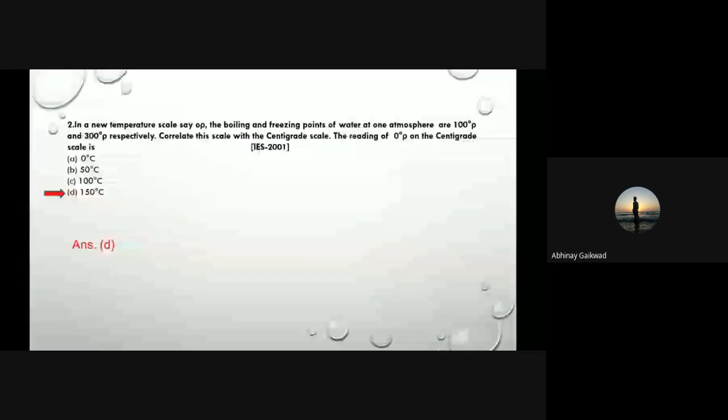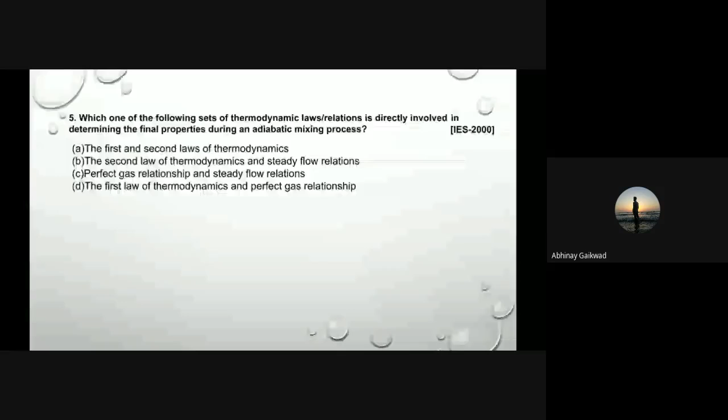Then the last quiz: the values of heat transfer and work transfer for four processes of a thermodynamic cycle are given below, and we expected the efficiency, okay, thermal efficiency and the work ratio. That also we have completed. Now today's first quiz.

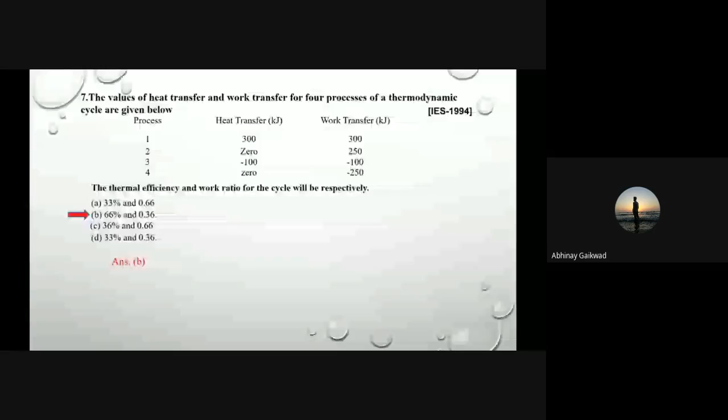Now, if a heat engine gives an output of 3 kilowatt when the input is 10,000 joule per second, then the thermal efficiency of the engine will be. I think everybody's screen, the question is appearing. So I expect now, it is a heat engine gives an output of 3 kilowatt when the input is 10,000 joule per second, then the thermal efficiency of the engine will be. Very simple question asked in IAS 1995.

A heat engine gives an output of 3 kilowatt when the input is 10,000 joule per second. So that 10,000 joule per second is converted into kilowatt. Joule per second is watt, so it is 10 kilowatt. Input is 10 kilowatt and output is 3 divided by 10. Correct answer - maximum are giving answer C.

They are wrong. So answer is - I think output is 3 kilowatt and input is 10 kilowatt. 3 divided by 10 it will become 30%.

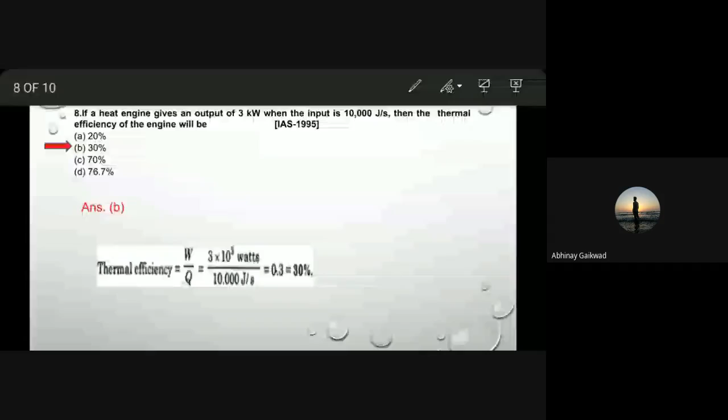Next question is ready on your screen. 170 kilojoule of heat is supplied to a system at constant volume. Then the system rejects 180 kilojoule of heat at constant pressure, and 40 kilojoule of work is done on it. The system is finally brought to its original state by an adiabatic process. If the initial value of internal energy is 100 kilojoule, then which one of the following statements is correct?

I expect answers from you in the message box. So 170 kilojoule of heat is supplied to a system at constant volume - the system is having constant volume and at that time 170 kilojoule of heat is supplied. Initially when that system is there, the initial internal energy was 100 kilojoule. So if the initial value of internal energy is 100 kilojoule, then which one of the following statements is correct?

Option A: the highest value of internal energy occurs at the end of the constant volume process. Option B: the highest value of internal energy occurs at the end of the constant pressure process. Option C: the highest value of internal energy occurs after adiabatic expansion. And option D: internal energy is equal at all points.

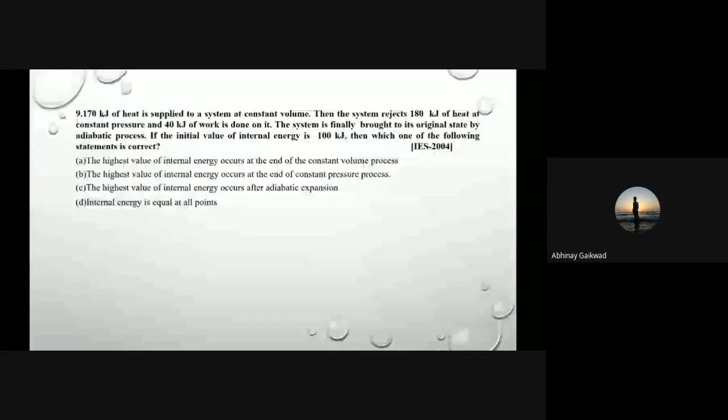Then after the process, work happens, and as work is obtained, definitely here heat supply remains the same, but in that case internal energy is also going to decrease because some part of it gets converted to work. After expansion, the internal energy goes on decreasing. So the answer will definitely be A. Correct, the answer is A.

So at the end of the constant volume process, internal energy will be highest, and afterwards it goes on decreasing during expansion - meaning afterwards the energy will not increase further. So it will be more at the end of the constant volume process.

Now next question. A gas contained in a cylinder is compressed, the work required for compression being 5,000 kilojoule. During the process, heat interaction of a certain amount causes the surrounding to be heated. The change of the gas during the process is - the question is on your screen.

I expect that more correct answers should come. The answer - gas is contained in a cylinder, compression work is there. So it is asked in GATE examination 2004.

During heat interaction, the surrounding is heated - supplied heat is 2000, so dq is equal to 2000. For compression we have to give work, my work is minus 5000, because we have to supply the work minus 5000, and heat is rejected to the surrounding, therefore it is also minus 2000. So minus 2000 equals delta U minus 5000, and if that 5000 comes to this side, it becomes minus 2000 plus 5000. The answer may be C, that is plus 3000. So how many got it, I don't know.

So C is there, Dhanasri Sonone I think, okay, Yogesh Samudhi Deshpande, okay, then Arno Gaikwad.

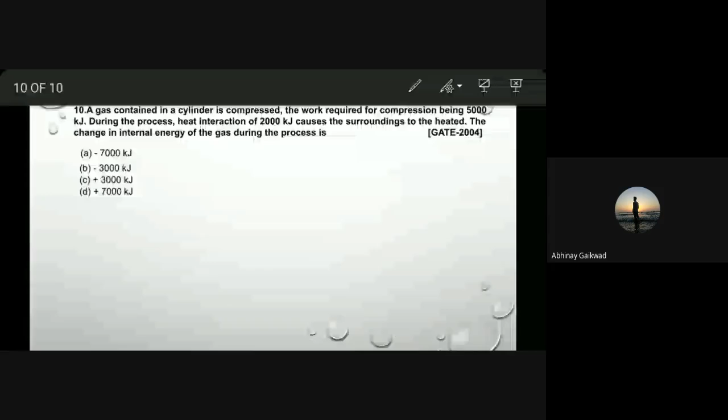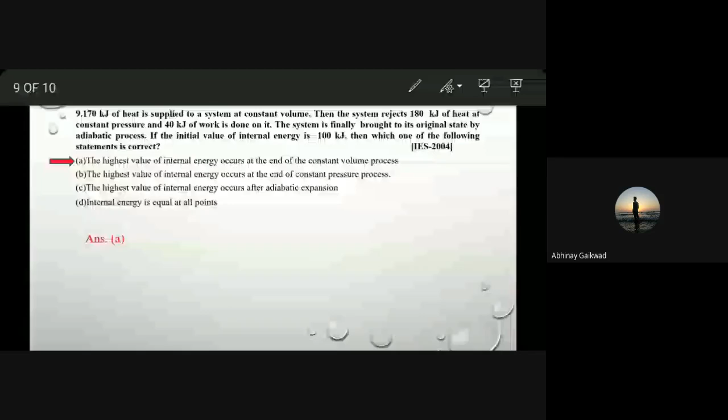The answer is C, correct, 3000 kilojoule. How it is coming 3000? Heat supplied is minus 2000 because it is supplied to surrounding, and delta U plus W is also supplied, therefore it is minus 5000. So these are the answers.

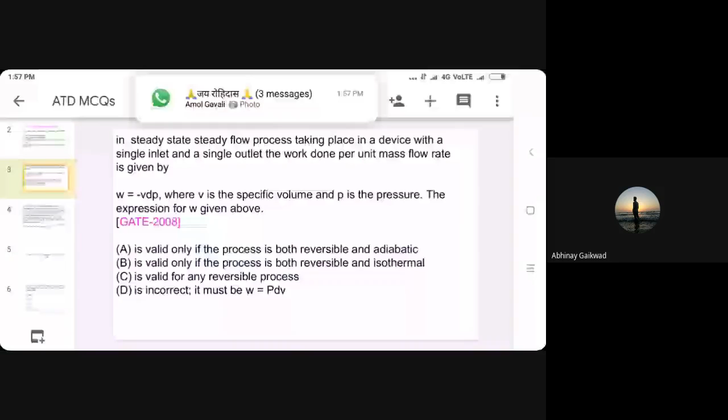Okay, next question. In steady state, steady flow process taking place in a device with a single inlet and single outlet, the work done per unit mass flow rate is given by W is equal to minus VdP, where V is specific volume and P is pressure. Expression for W given above, what is V? W is equal to minus VdP.

So this expression is going to be valid for which process? A is valid only if the process is both reversible and adiabatic. Is it valid for process? It is incorrect, it must be W is equal to PdV. Okay, so what is your logic?

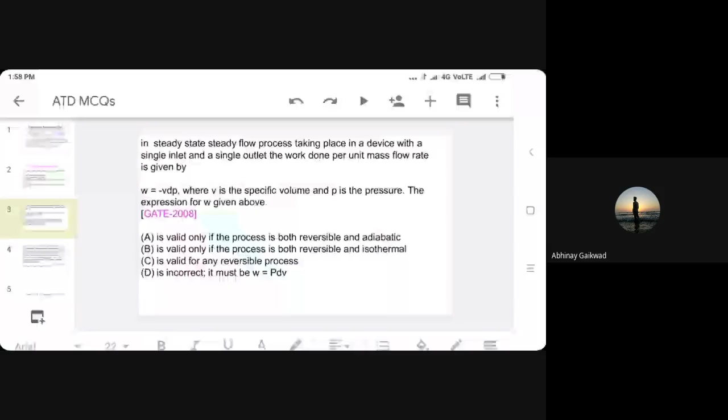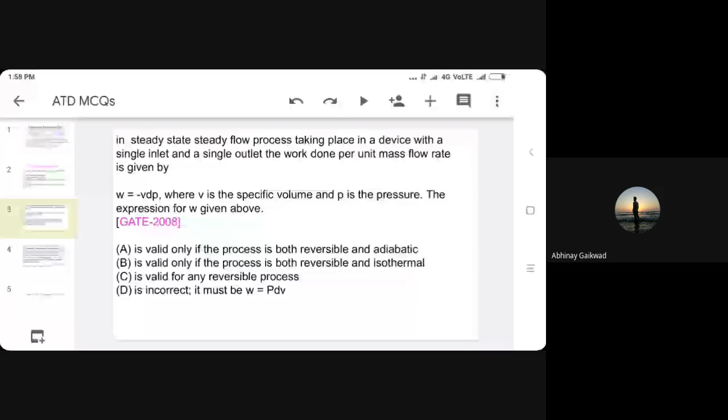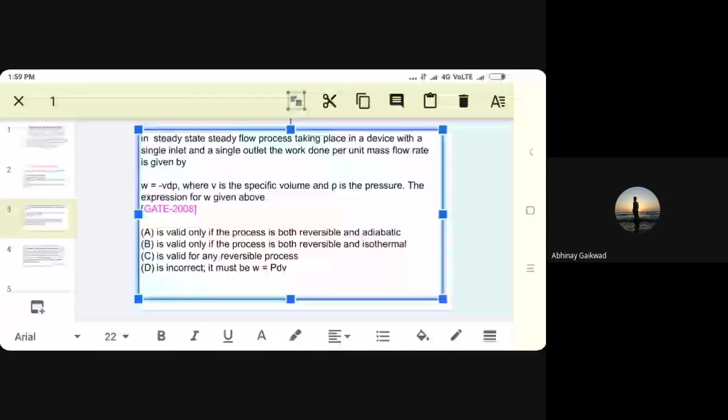So reversible process there is valid only for reversible process. Other processes, cyclic processes we are considering, okay. Other processes are there. We are generally considering work as PDV, but only for reversible process. And if it is steady state reversible process, the work can be considered as PDV... this is going to be valid only for the reversible process.

Okay, next question. A gas expands in a frictionless piston cylinder arrangement. The expansion process is resisted by an ambient pressure of 100 kilopascal. During the expansion process, the pressure of the system gas remains at 300 kilopascal. The change of volume of the gas is 0.01 meter cube. The maximum amount of work that could be utilized from the above process is. So gas expands in frictionless piston cylinder arrangement, work is doing now quantitatively. The expansion process is very slow and is resisted.

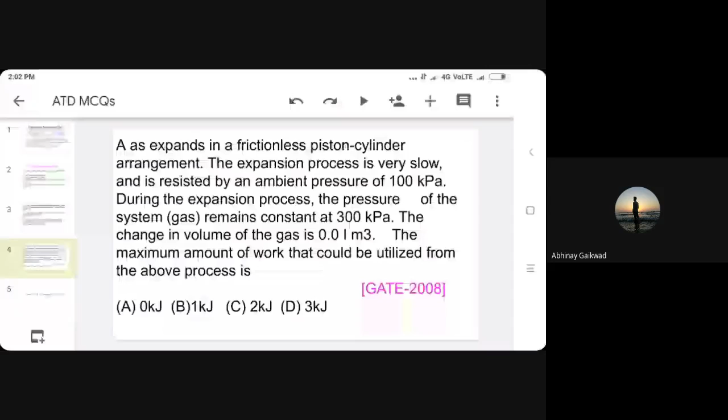So here PdV, gauge pressure is there, it is going to be 300 minus 100, into that volume 0.01. So that is directly they have converted. If it is work in kilopascal, so directly 0.1, that answer is we are getting in terms of kilojoule.

Okay, for next, for reversible adiabatic compression in a steady flow process, the work transfer per unit mass is. Anybody?

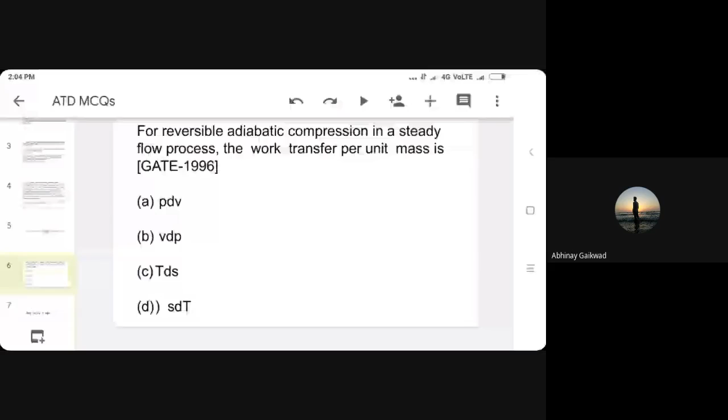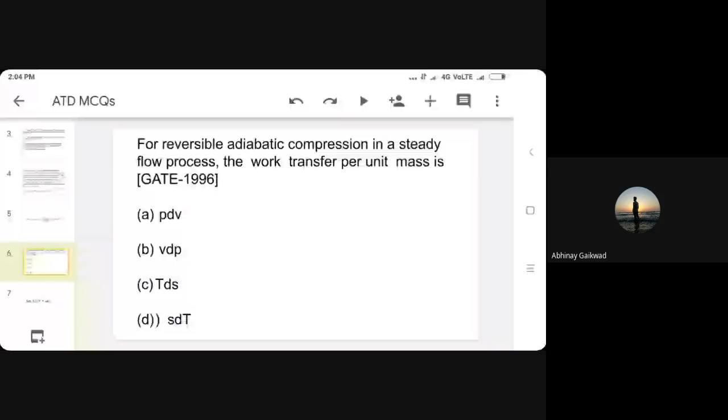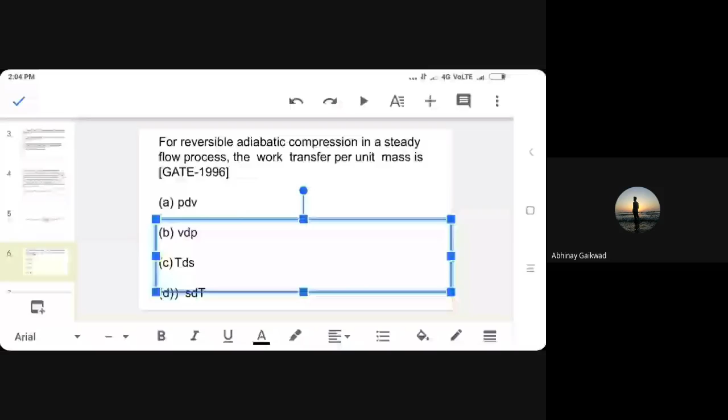Remember that in reversible processes, work transfer is equal to VdP, and in other processes, the work transfer is PdV. Now I expect everybody should be involved in this because it is familiar to everybody.

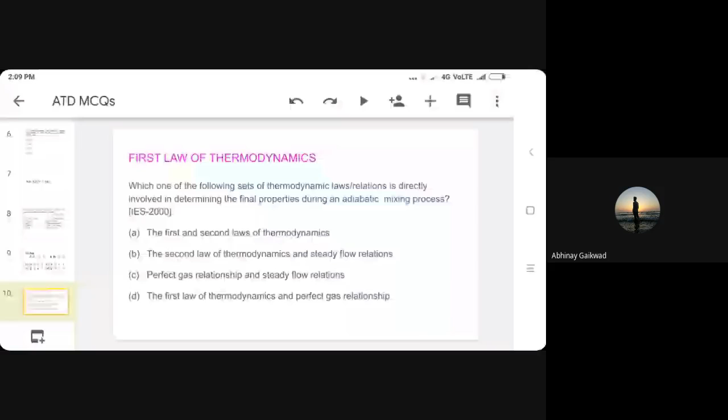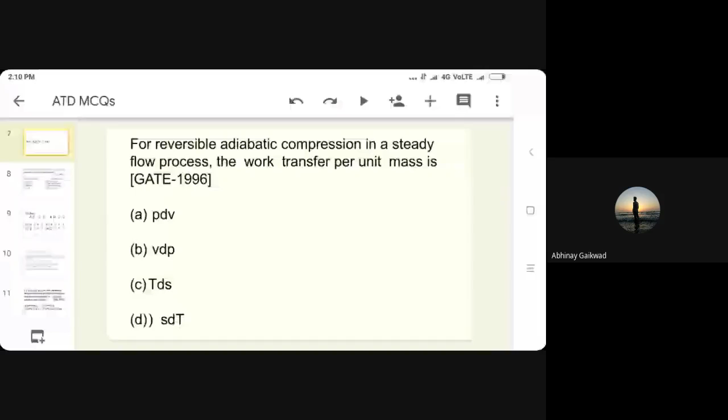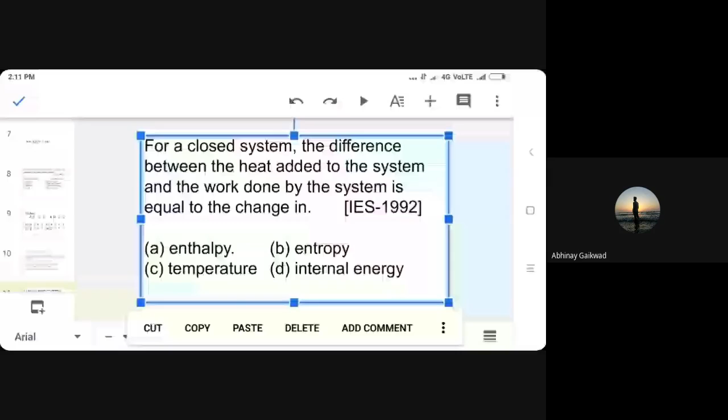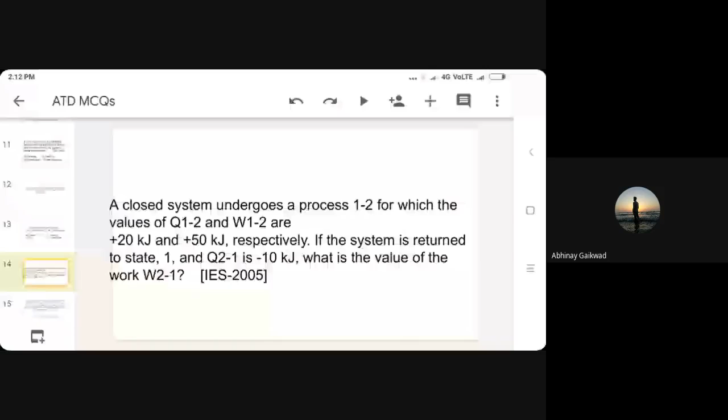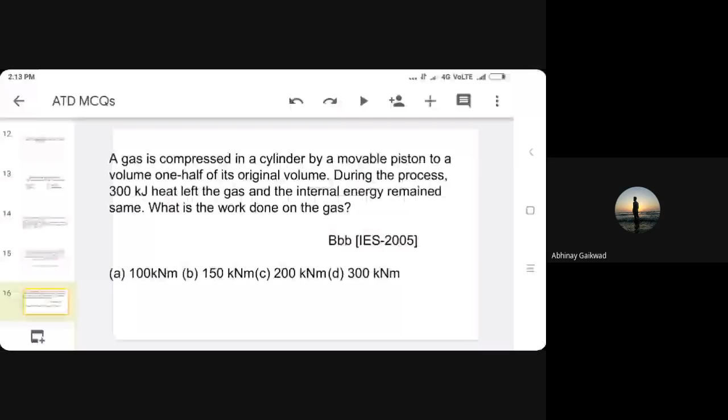A gas is compressed in a cylinder by a movable piston to a volume one half of its original volume. During the process, 300 kilojoule heat left the gas and internal energy remains the same. What is the work done on the gas? The gas is compressed in a cylinder by a movable piston to a volume one half of its original volume. During the process, 300 kilojoule heat left the gas and internal energy remains the same.

So delta U is equal to 0. What is work? Yesterday only, I think, work was covered. It is, I think, 300 kilonewton meter. So delta Q is equal to 0, sorry, delta U is equal to 0. Therefore, dq is equal to dw only.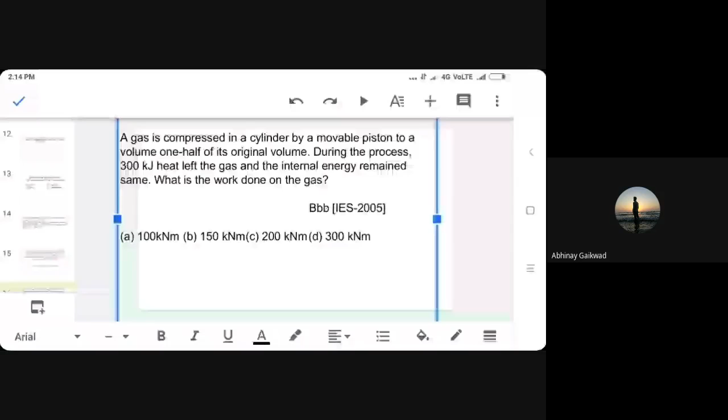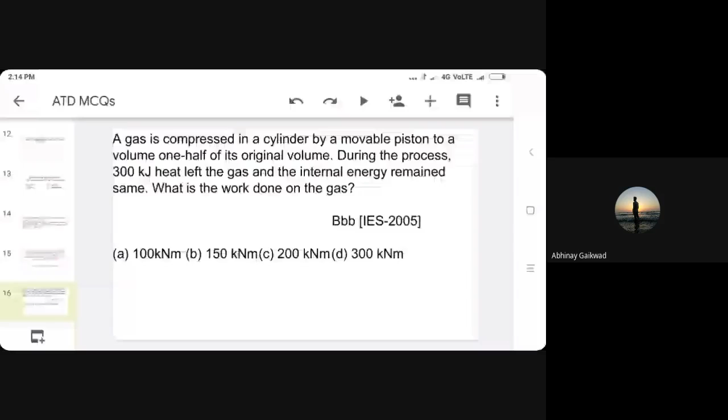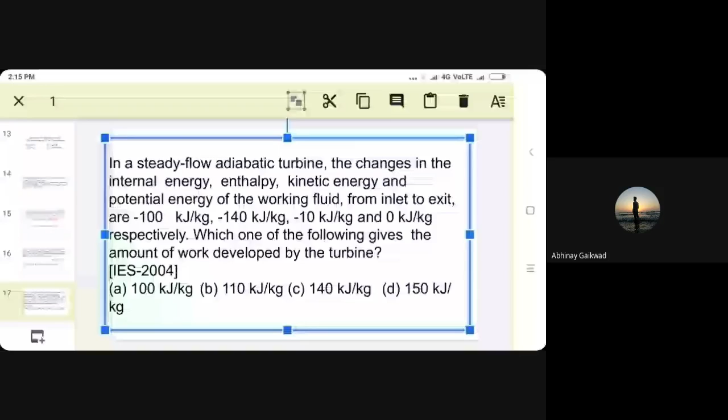It is also steady flow. Here in a steady flow adiabatic turbine, the changes in internal energy, enthalpy, kinetic energy, and potential energy of the working fluid from inlet to exit are minus 100 kilojoule per kg, minus 140 kilojoule per kg, minus 10 kilojoule per kg, and 0 kilojoule per kg respectively. Which one of the following gives the amount of work developed by the turbine?

Okay, now tell me the answer. So in a steady flow adiabatic turbine, adiabatic means what? Whatever heat and energy is there, whatever heat is supplied to the turbine is only rejected to the condenser, it is not supplied to the surrounding. That is an adiabatic turbine, so there is no loss of energy. So which one of the following gives the amount of work developed by the turbine?

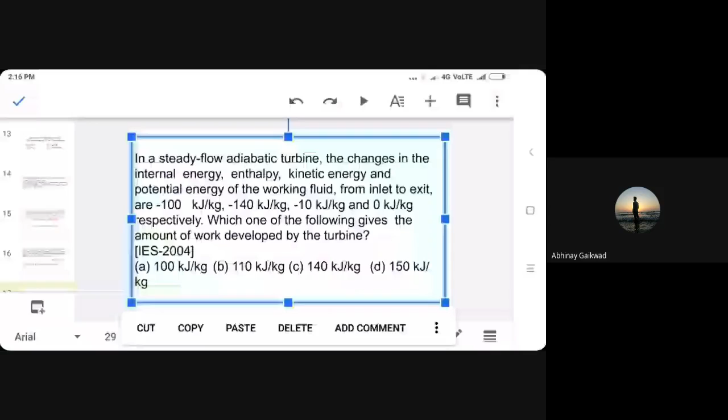So tell me the answer. This answer is D. Abhinay Gaikwad says D, Dhanasran says D, Prajwal Musa says D. Okay, so how are we calculating D? Kinetic energy and potential energy, enthalpy minus 100 kilojoule, minus 140 kilojoule, minus 10 kilojoule, and 0 kilojoule respectively. Which one of these gives the answer? What is the work developed by the turbine?

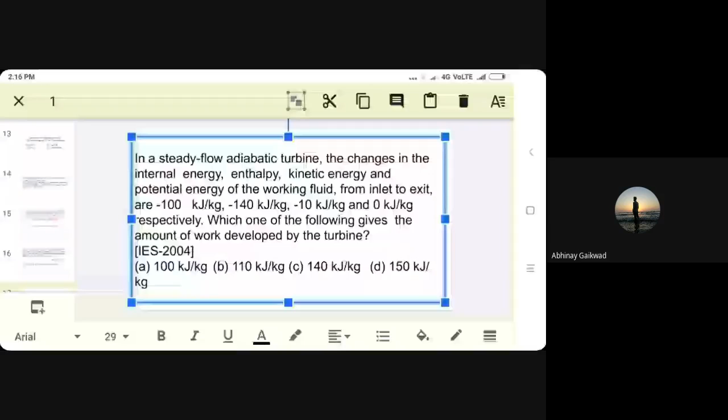So the steady flow energy equation we have to apply here, and from that we have to calculate the work developed by the turbine, and this is equal to, I think, 150 kilojoule. Okay, so it is, I think it is, the answer is 150 kilojoule.

This I did not get, so 0 is equal to, we can say it as 0 here plus W is equal to minus 140, or 0 is equal to minus W minus 140 minus 10. So 150 is coming. So, okay, change in internal energy is: dq is equal to du plus dw in that case, and the du value is also okay.

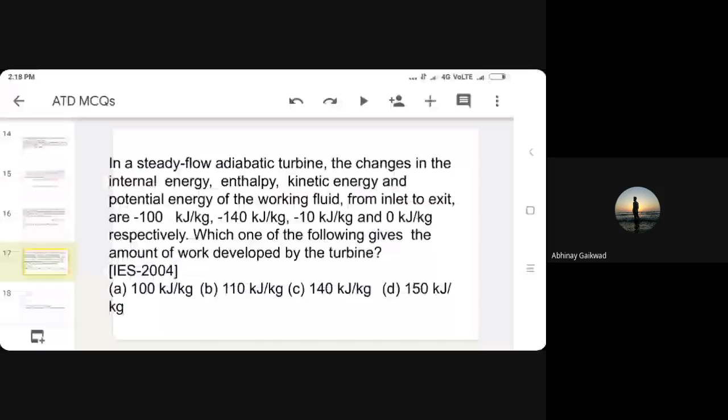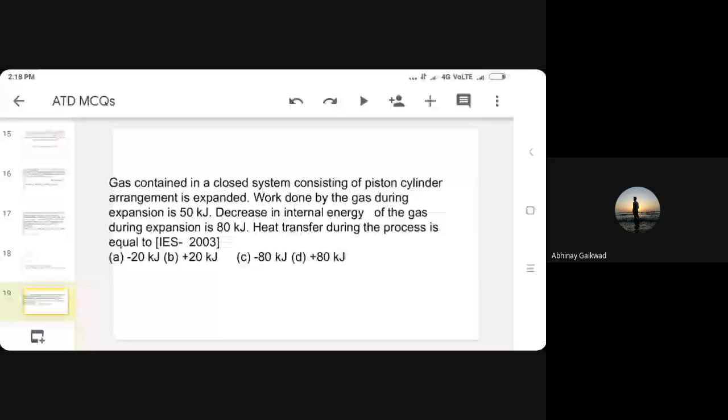Okay, next, gas contained... so I will explain this afterwards. Last question: the gas contained in a closed system consisting of a piston cylinder arrangement is expanded. Work done by the gas during the expansion is 50 kilojoule. Decrease in internal energy of the gas during expansion is 80 kilojoule. Heat transferred in the process is equal to, very simple, dq is equal to du plus dw.

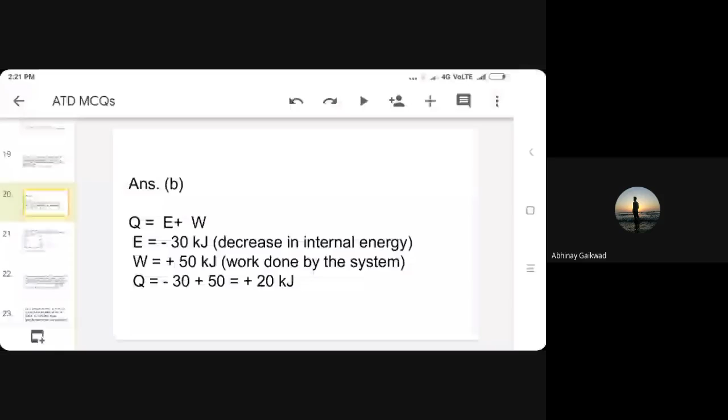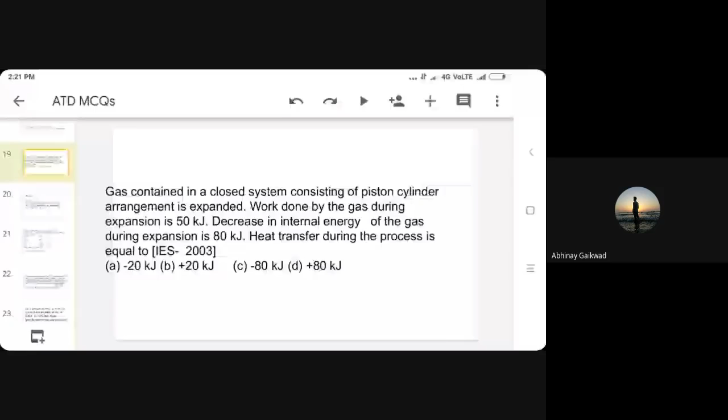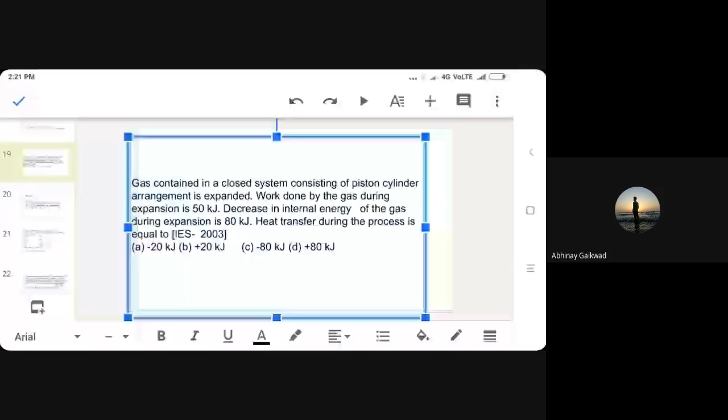So minus 30 is correct here in this case.

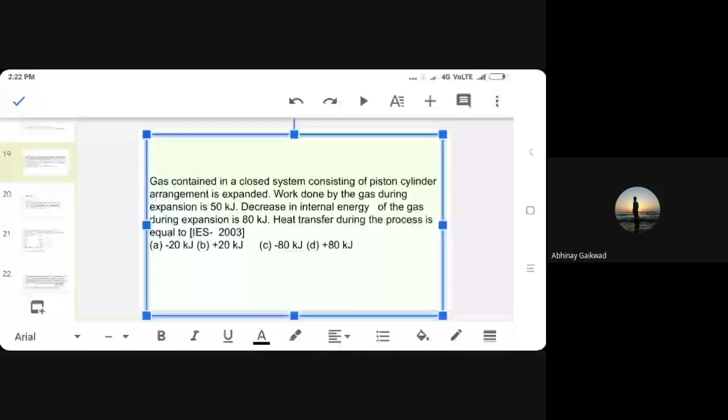Okay, yesterday I think we have covered this. Okay, last numerical of today.

A system while undergoing a cycle ABCDA has the values of heat and work transfer as given below. So AB 687, this is heat transfer, and on the extreme right is work transfer, 474, for AB. The power developed in kilowatt is nearly what?

So in the AB process, here is the work transfer and here is the heat supply. The power developed in kilowatt is nearly - how much work are we developing? How much work are you getting?

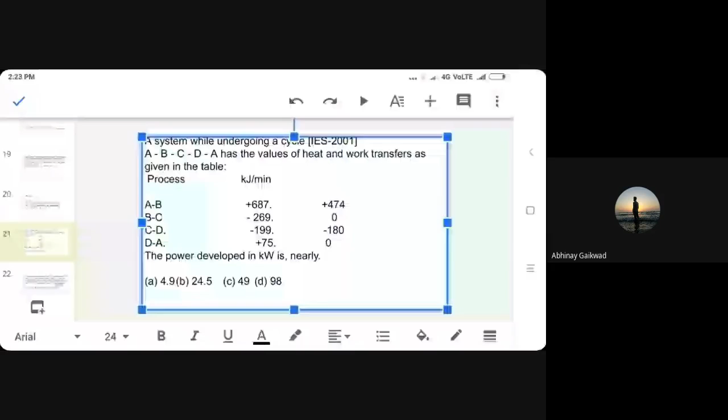So on the extreme right side, they have given 474 minus 180, and from that we can get the work transfer. Work developed is equal to, in kilojoule per minute, that we are getting. So this is heat transfer here - central kilojoule per minute is heat transfer. On the right side here we have work transfer. So 474, and therefore we can say 474 minus 180 will be the work in kilojoule per minute.

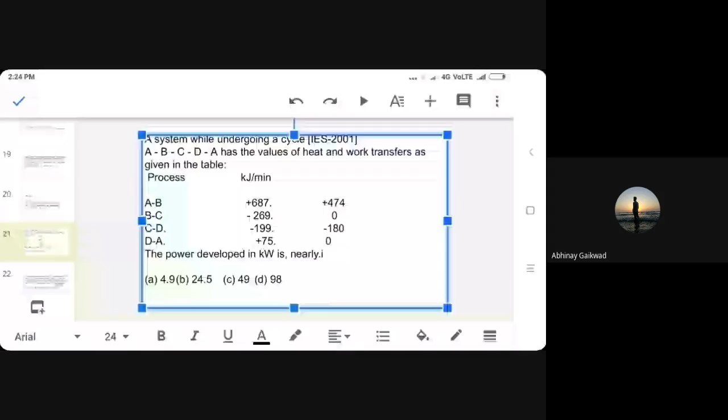Work done in kilojoule per minute, and that is equal to kilojoule per minute, but we want the answer in kilowatt, therefore it should be kilojoule per second - it should be divided by 60. The answer is 4.8 or 4.9. So Jaydev Nanore is getting 4.9, Nana Sachin is getting 4.8. Okay, so I think the answer is 4.9.

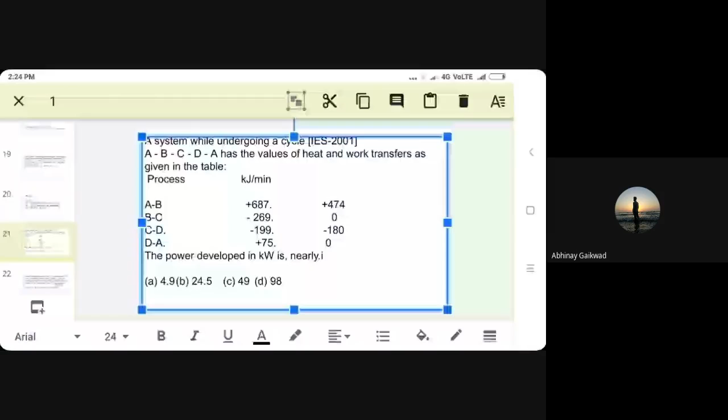We'll see, it's very simple. So 474 minus 180 comes out to 294 kilojoule per minute. It should be divided by 60. Definitely the answer will be A, that is 4.9.

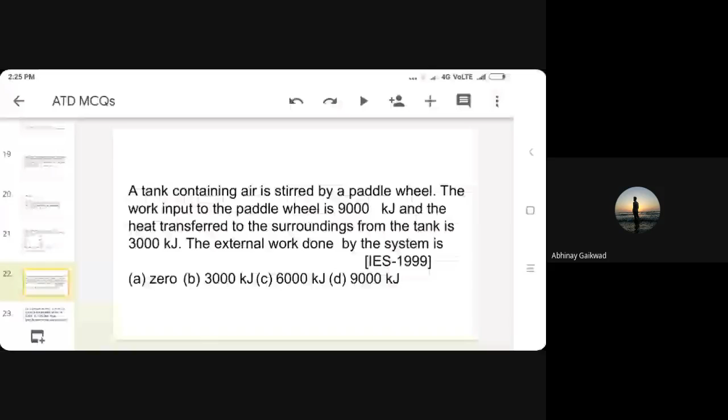Okay, now last one - still we have 5 to 6 minutes, 5 minutes, so last question now. A tank containing air is stirred by a paddle wheel. The work input to the paddle wheel is 9,000 kilojoule, and heat transferred to surrounding from the tank is 3,000 kilojoule. The external work done by the system is...

So we have to supply the work from the system, therefore W we have to calculate. A tank is stirred by the paddle wheel, work input to the paddle wheel is 9,000, so W is 9,000, and heat transport to the surrounding from the tank is 3,000 kilojoule. The external work done - definitely work input is 9,000 and the heat transport to surrounding is 3,000. The external work done by the system is 6,000 kilojoules. So how much are we getting?

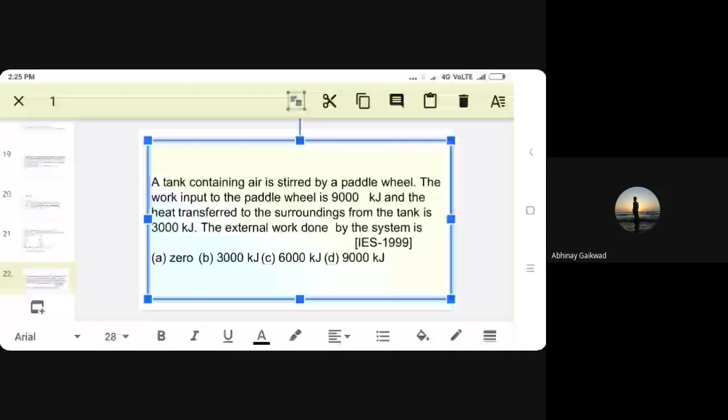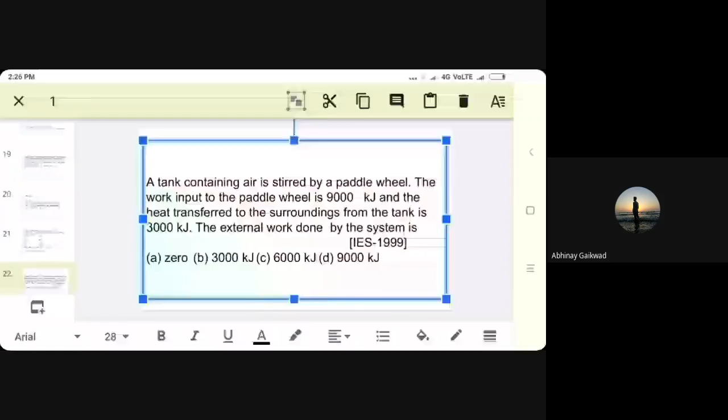External work equals change in internal energy, and this is equal to 6000 kilojoule - kilojoule is the answer.

So anybody? The answer is C, 6000, correct. Sneha is correct. So 6000 kilojoule is the answer. The difference between them is the external work supplied from the surrounding side.